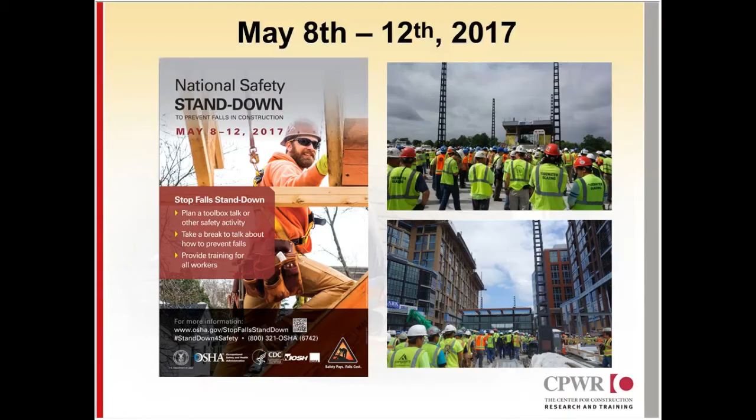So, as many of you probably know, this webinar is very timely because this week is the 2017 Stand Down. The Stand Down was conceived by OSHA in 2014 as part of the National Falls Campaign to raise awareness surrounding the severity of fall hazards in construction and the importance of preventing them. In a construction setting, the term safety stand down can be used to describe a wide variety of activities where normal work is paused and the entire site focuses on a particular safety issue.

Some employers may use stand downs to call attention to specific hazards present on their site as an intervention. The campaign has adopted the use of the stand down to draw attention specifically to fall hazards in a nationwide week-long event. The campaign is currently in its 6th year, and the stand down is in its 4th, but as you will see in this presentation, we still have a lot of work to do. Okay. And with that, I will hand it over to Sue for a review of BLS data on fatal and non-fatal falls.

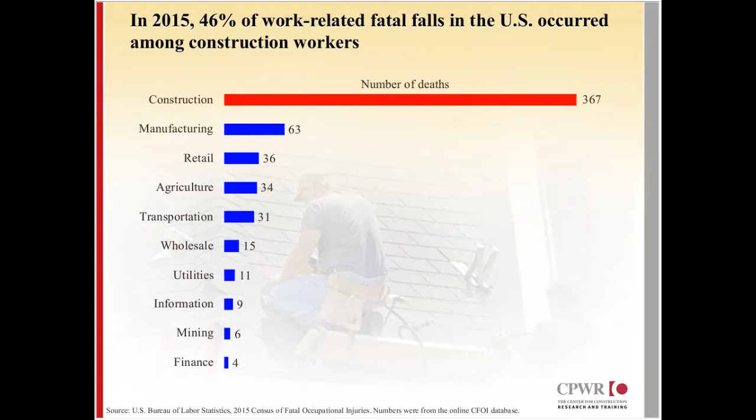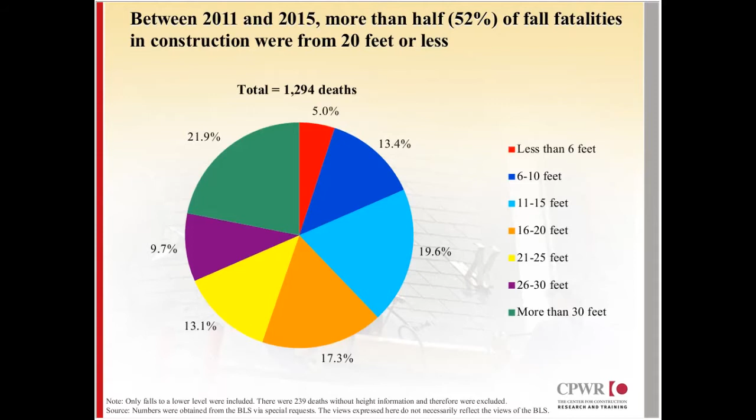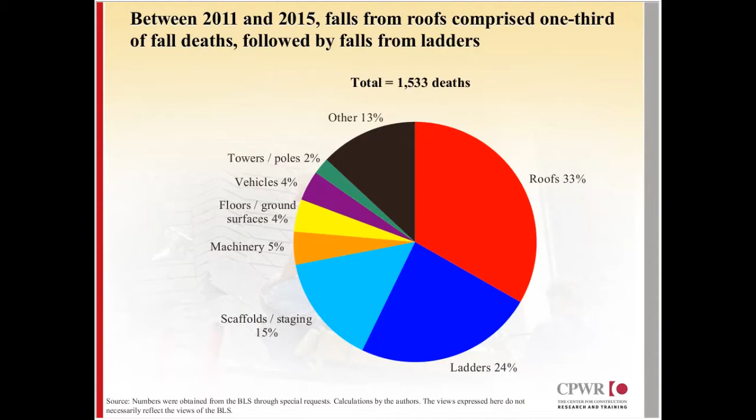In terms of falls, falls from roofs accounted for about 1/3, and falls from ladders accounted for 24%. Overall, falls from roofs, ladders, scaffolds, and stagings accounted for 72% of fall fatalities in construction.

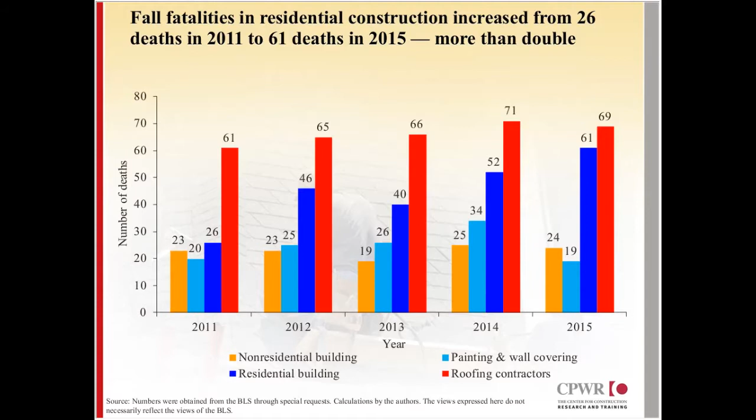By construction subsector, we know that roofing contractors always have a higher number of fatal falls. But if you look over these years, the numbers are relatively flat, on average about 66. However, in residential building, the fatalities due to falls increased from 26 to 61 during this time period, more than double.

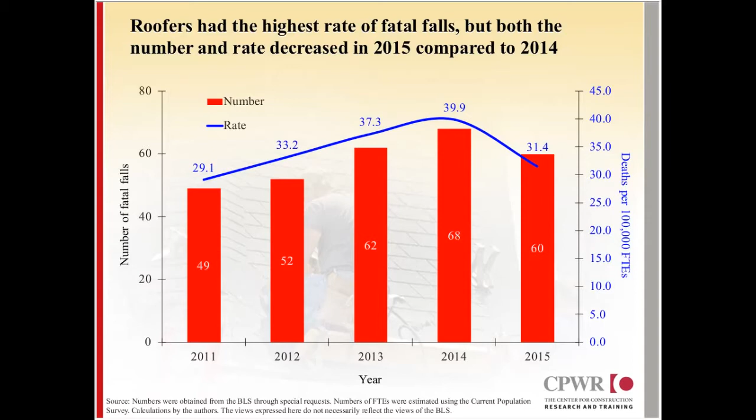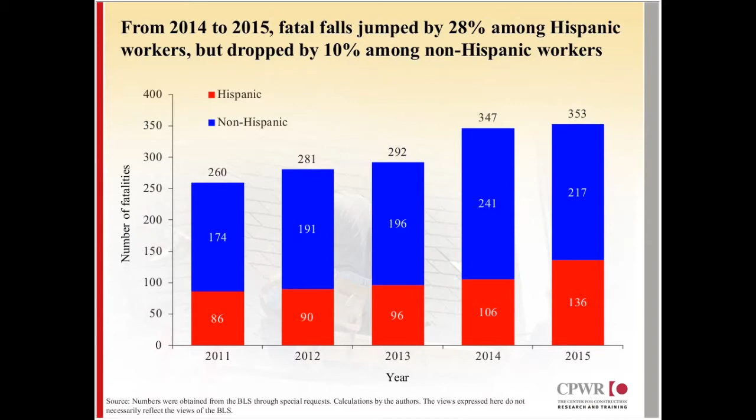From 2014 to 2015, fatal falls jumped by 28% among Hispanic workers, but dropped by 10% among non-Hispanic workers. Hispanic workers not only had a higher number of fall fatalities, but also a higher rate of fall fatalities. In addition to Hispanic workers, foreign-born workers and self-employed workers also had an elevated risk of fatal falls.

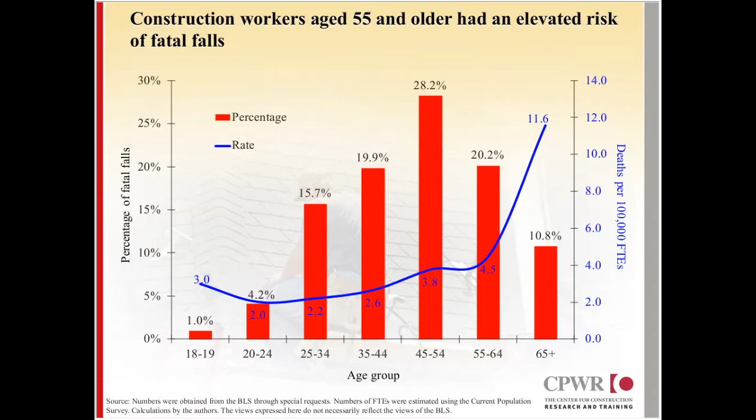For the non-fatal injuries, the overall trends are similar to the fatality trends. Both the number and the rate of non-fatal falls dropped during the recession and then increased from 2011 to 2015, after the lowest level in 2010.

By construction occupation, you can see the patterns of non-fatal falls and fatal falls are quite different. While construction laborers had the largest number of non-fatal falls, helpers had the highest rate of non-fatal falls. The helpers are not a particular occupation; they can be helpers to carpenters, helpers to roofers, etc. We just combined the numbers together because for each separate group, the number is very small.

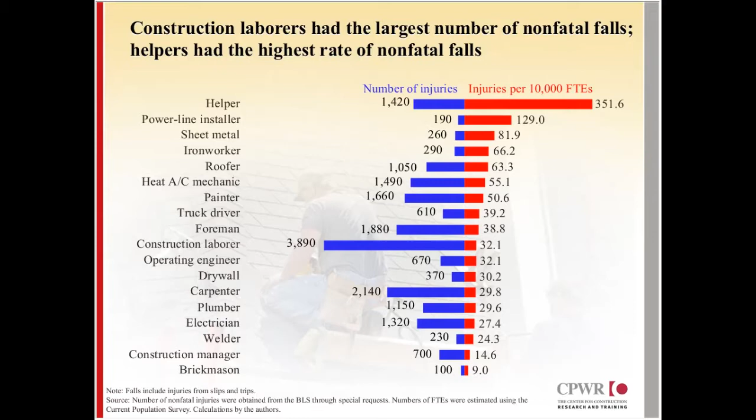That's what I'd like to share with you. The data I presented were from the BLS, which represent the overall trend at the national level. Next, I will hand over the presentation to Gavin, who will talk about our findings from the CPWR Fatality Maps. He will talk more about geographical variation. Gavin, please. Thank you, Sue, and good afternoon, everyone.

So CPWR's interactive fatality maps can be found at the campaign website, which is stopconstructionfalls.com. Two versions of the map are available for each year, going back to 2011 when we began mapping fatalities in construction. One of the versions of the map includes different types of fatal construction injuries, while the other map contains only fatal falls.

Users can scroll around the map, zoom in or out, and also search for specific locations. Each of the pins, like you see on this slide, represents a construction worker who died on the job. Now, if you were to click on one of the pins, it would open a pop-up box with summary information similar to what you see here on this slide.

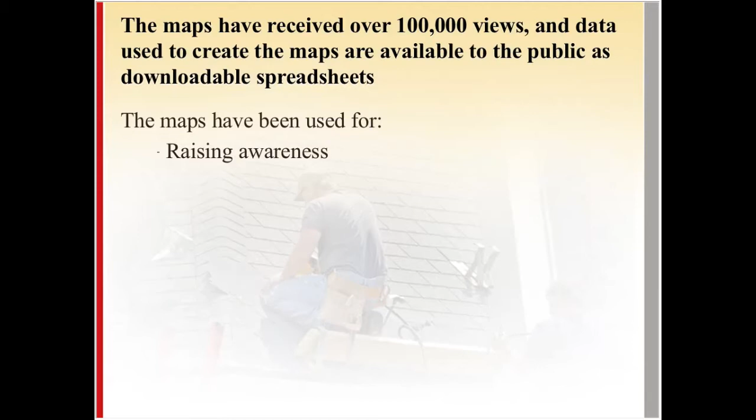So in terms of the uses of the map, well, they've received over 100,000 views to date combined, and the data that's used to create the maps are available to the public as downloadable spreadsheets, also on the campaign website. And so the maps have been used for raising awareness, increasing public access to fatality data, tracking recent deaths for the fall prevention campaign.

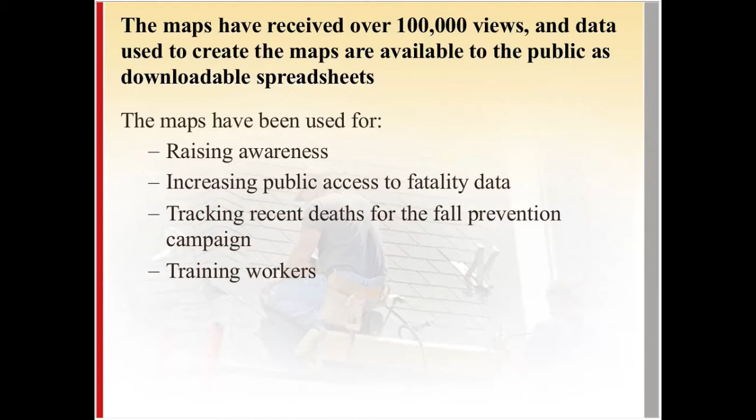And we've also heard from users of the map that they've used the maps as an effective tool while training workers on fall prevention. We know that they've been used in Workers' Memorial Day events and for stand-down activities as well. At this point, I'd like to mention that the news reports, which are featured and can be accessed through the map, can also tell a different story than the numbers alone. So they can help to remind us that these are real people behind the numbers, and they show up to work every day expecting to come home.

With that said, we're going to get back to the numbers from the quarterly data report. So the CPWR Fatality Maps have provided access to information on 3,803 construction fatalities, including 1,276 falls over the past 6 years. These numbers may already strike you as high. In fact, these numbers only represent about 3/4 of all construction fatalities and about 2/3 of fatal construction falls that occurred from 2011 to 2015.

BLS fatality data for 2016 are not yet available, but these CFOI data are scheduled for release towards the end of this year. The fatality maps are created using public data from OSHA investigations and news reports. And as you can see on the slide, both construction fatalities and also fatal falls, which are shown on the maps, have both increased since the beginning of the project.

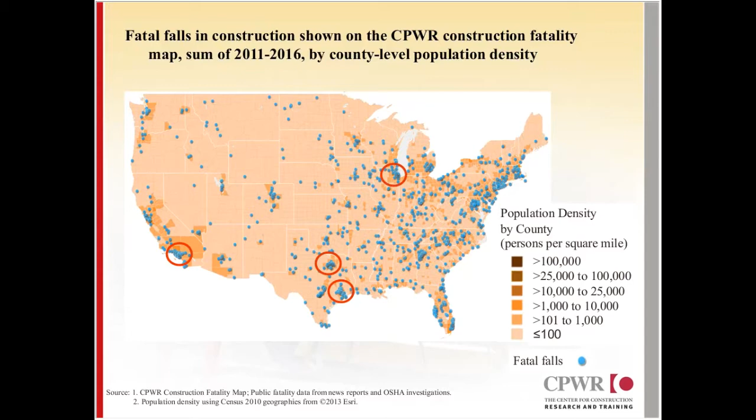For the quarterly data report, we did take a closer look at New York City, which is one of the most densely populated areas in the country. We know from the Fatality Map that at least 51 construction workers died of a work-related fall in New York City since 2011. This map of the city's 5 boroughs shows us that many of these deaths occurred in Manhattan, which is shown in orange on the map.

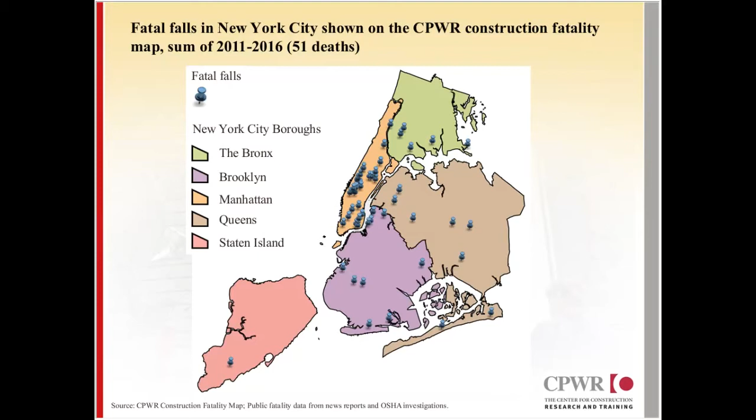So to better understand the high concentration of fatal falls in this part of the city, we analyzed building permit data from the U.S. Census Bureau. As Sue explained earlier, a high proportion of fatal falls occur during residential building construction. So this chart illustrates a recent surge in residential building construction in the borough of Manhattan.

What we see is that the post-recession building boom in Manhattan reached what was really an historic high in 2015, and that even surpasses the peak of the last building boom, which was in 2008, with around 9,700 new housing units approved that year through building permits. And this local trend in residential construction activity helps to explain the high number of fatal falls we identified in Manhattan since 2011.

Furthermore, ongoing projects authorized in recent years could also indicate a high level of sustained residential construction activity in the years to come, putting a large number of workers at risk of a fall if preventive measures are not prioritized and put into place.

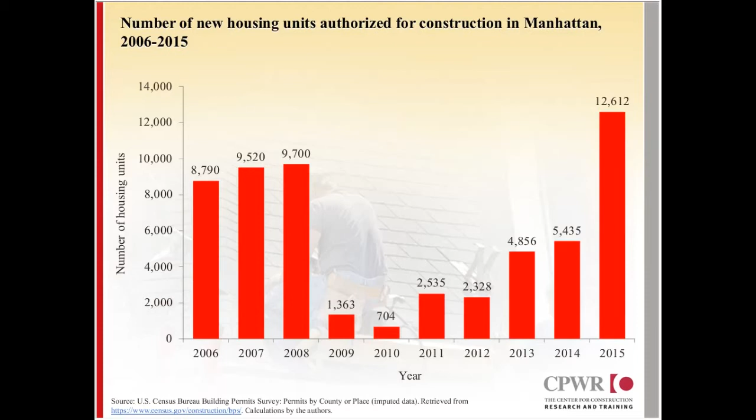And when we combine all of these numbers with the other data sources, such as our success stories, independent reports from various companies and entities such as the U.S. Air Force, we know that just from the first 3 stand-downs, we reached more than 5 million workers, both nationwide and internationally. There has been participation in every state and territory and a lot of international participation as well, which was initially very unexpected. So, despite that, we obviously need to keep it going.

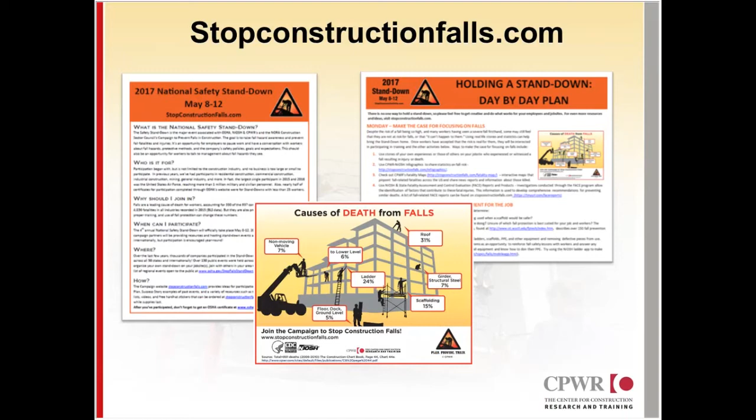And we also have this year a new success story submission form. So for anyone who is participating in the stand-down and would like to tell us about it afterward, please go to the link on the bottom of the screen and let us know, and we may follow up with you to do an article, and I think we will be doing a report based on the success stories this year as well to get more data that is helpful to others who want to replicate events.

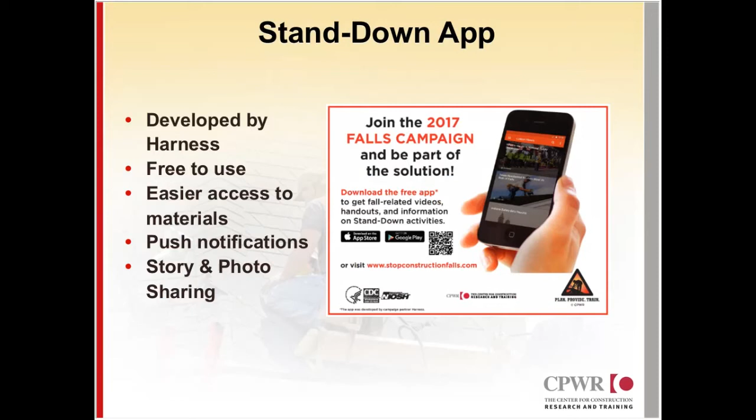And finally, there is also a smartphone app for both iPhone and Android users. It has the same information that's available on stopconstructionfalls.com. It's just easier to access if you wanted to pull it up on a job site, and you can set it up for push notifications. There's also a place to share your success story and photos through the app as well.

And with that, in conclusion, we obviously know that the stand down has reached millions of workers. It's a really important event, but clearly fall injuries and fatalities have increased, especially among Hispanic workers in residential construction and in big cities. So the campaign is still just as important as ever, and we hope that you all are participating this week or month.

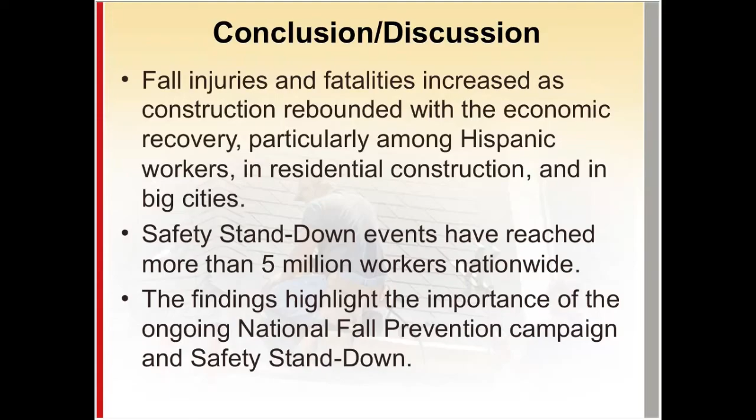And with that, I will go ahead and start on the questions. We already have a few in here, so bear with me for a moment. Okay, the first question is, this has come up in OSHA 30 classes I teach. Why does OSHA distinguish between Hispanic workers in their statistics?

And Sue, I don't know if you had any thoughts on that with regard to the BLS data. It's not OSHA data, but oh, you mean why we use the BLS data instead of OSHA's inspection data? Is that the question? Why is there a distinction between all workers and Hispanic workers is the question. Why we have separated Hispanic workers and non-Hispanic workers, is that the question? Yes, well, the question is why does OSHA, but I think it applies to all data. All the data, why when we do the analysis, we separate Hispanic and non-Hispanic workers? I just want to first understand the question before I answer it. Is that the question? Yeah. Okay. Yes. So let me briefly explain that.

Based on our surveillance, we found Hispanic workers and other worker groups in construction have quite different patterns in terms of demographics and injuries. So that's why usually when we do the analysis, we wanted to know what's going on with Hispanic workers and whether they're the same or not. If I go back to the one slide, I'd like to show you why. If you look at this slide,

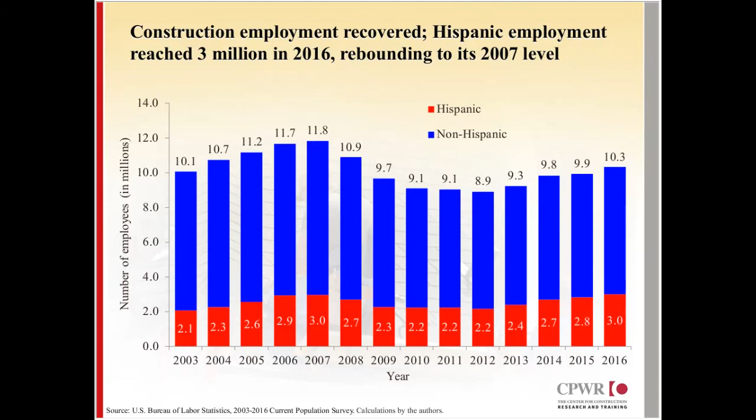The next question is, a lot of the graphs in the presentation and in the last presentation noted something that said the revised OIICS. What does that stand for? Which one? So, that's the occupational injury and illness classification system. Is that right? So I might have left out. Yeah. Oh, so yeah, let me explain that. Occupational injury and illness classification system.

Because the BLS started to use the new coding system since 2011, the categories of injuries are different. So they are not comparable. But even though they are not directly comparable, we still want to say what's going on in the historical data. So that's why, on the one hand, we use the historical data. On the other hand, we'd like to distinguish before and after the coding change. So that's what I did not explain.

That's the occupational injury and illness classification system. The current version BLS uses is version 2. And previously, they used the 1992 version. So for fall injuries in particular, there were a lot of changes, including the fall by height. BLS did not provide such information before, but they started to provide this information since 2011, which made it possible for us to provide one chart in today's presentation by height.

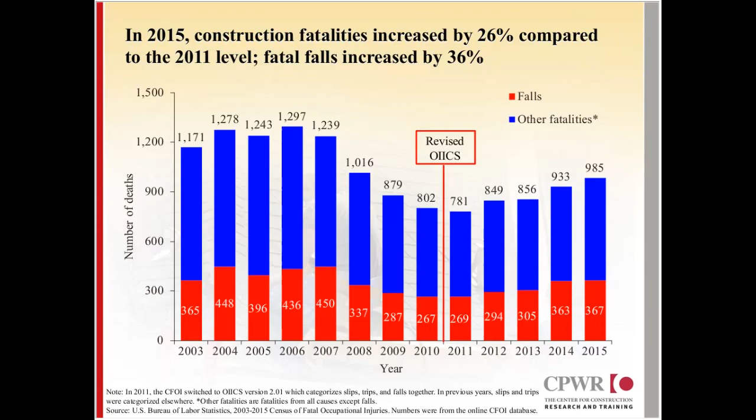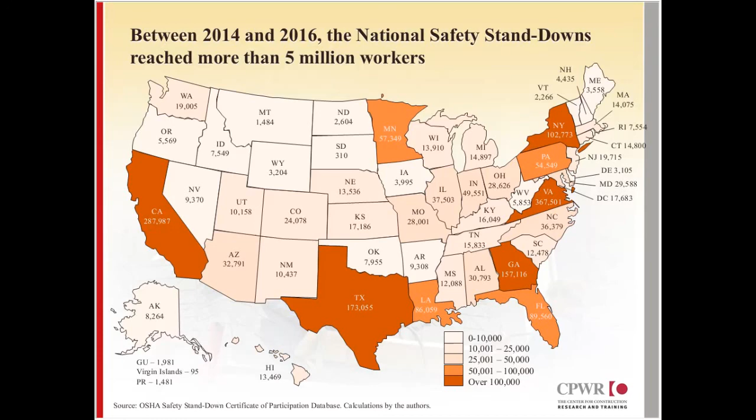So if you broke it down by year, I believe the first year and maybe even the second year, California had higher numbers than Virginia, just based on the sheer amount of construction going on and the number of workers. And then, let me go to the next slide, we had a huge bump in government participation, in particular this most recent year, the 2016 stand-down. So that ended up skewing the numbers in states like Virginia to be much higher.